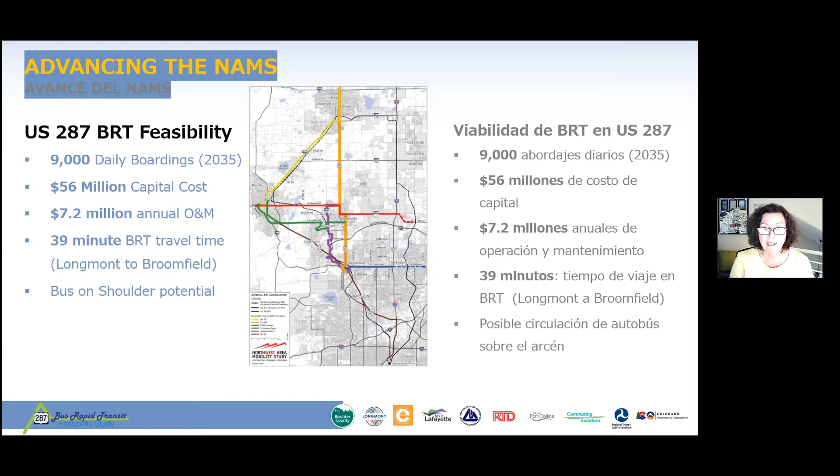So I'm very excited that we're here. It's a long time in the coming, and it's really the time to be moving forward, and a lot of good work's been done to date, and we certainly have more work to do in front of us, and we're anxious to hear your information to help guide that work with us. If I could have the next slide, please.

So when I think about this project, again, not only the important place that it serves in the network of mobility, it's really about the collaboration to get here. And so while I represent the Boulder County team that's working on this project, we're working very closely in partnership with our colleagues from the City and County of Broomfield. And so this is really all about collaboration with all of our agencies, Boulder County, the local communities, City and County of Broomfield, and others. So at this point, I'd like to hand it off to my colleague, Sarah Grant from the City and County of Broomfield, to talk more about our partnerships and collaboration together. So take it away, Sarah, thanks.

Thank you, Kathleen. Good evening. I'm Sarah Grant, Transportation Manager with the City and County of Broomfield. And Kathleen did a great job of highlighting the regional transit network that we're trying to build here in the Northwest. Boulder County and Broomfield and many other communities in the Northwest have been working on building this vision of a robust network of multimodal transportation for over 20 years as a part of the Northwest mayors and commissioners alongside RTD and CDOT. US 287 is a key corridor connecting US 36 and Broomfield Station to Lafayette, Erie, Longmont, and beyond. We're pleased to be a part of this collaborative partnership with Boulder County.

And this evening, I do want to acknowledge that joining us tonight is our new RTD District I Representative, Director Davidson, and I'd like to afford him the opportunity to also say a few words. Thank you.

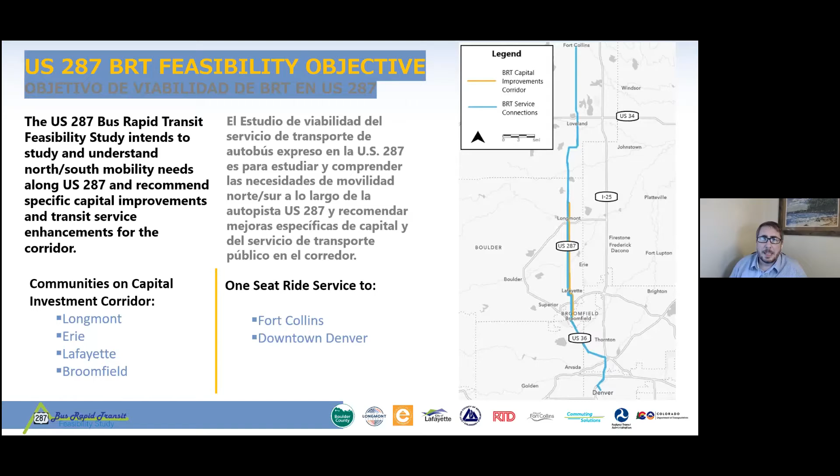And then beyond that little area, there are existing services with connections up to Fort Collins and into Denver. And so we are also looking at those services to look at the whole corridor in its entirety and what we can do for services as well.

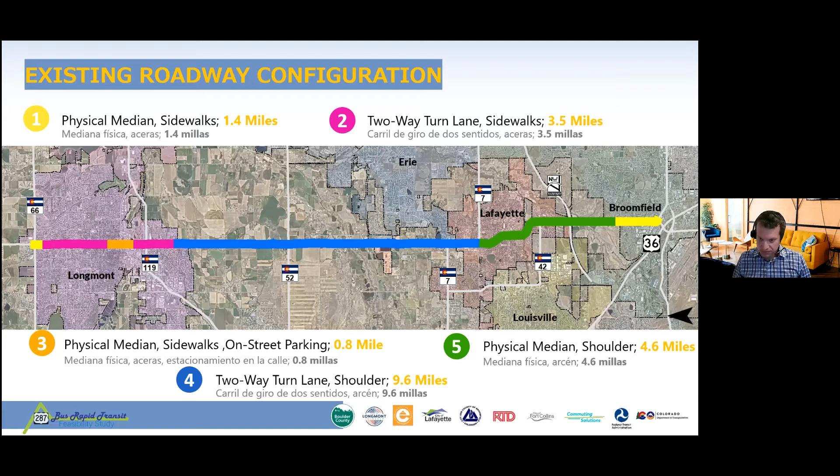So looking at things like number of travel lanes, are there sidewalks, is there on-street parking? It's something that we've been taking into account and will influence the recommendations as we assess the feasibility of BRT on the corridor. Part of this process, we've done quite a bit of data collection and analysis, and we have an existing conditions report that goes over some of that and will be publicized soon here.

From a traffic side of things, we've done some data collection, which has been a little tricky in 2020 due to COVID, but we have a lot of traffic counts from before COVID and some traffic counts during, and we've got a process going through to take a look and see what the traffic looks like throughout the corridor, and then specifically at intersections, how much delay is there now and will be there in the future, and how specific BRT, bus rapid transit, improvements might influence that as far as bus travel times and car travel times.

The key intersections that are currently experiencing the largest amount of delay, we've got 6 listed here, but the bolded ones are the ones with more delay of those that were evaluated: Baseline, the Northwest Parkway where that joins up with 287, and then Isabelle Road. There are other areas of congestion, but these are the key points. And as part of the recommendations, we'll be looking at these in more detail to come up with specific treatments that might improve things for a variety of users.

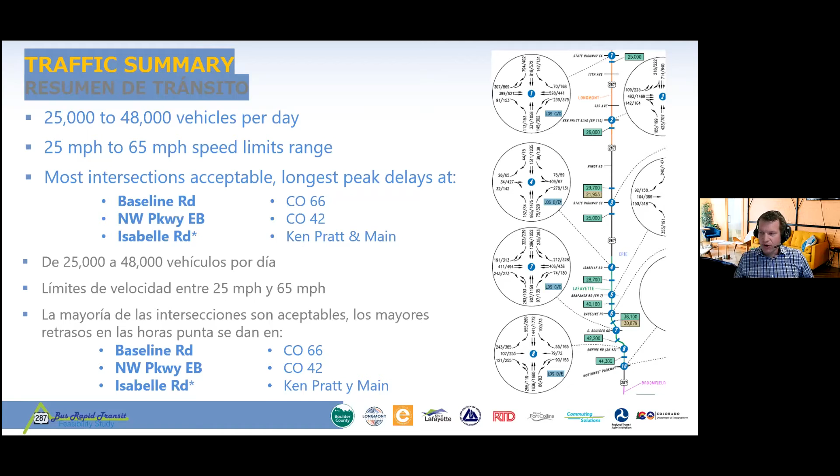So I'm going to transition into really the BRT feasibility analysis. That's the portion of the project where we're taking a look at what improvements could be made where, and what impact that might have upon the area. So to start out, just to give a little BRT primer, I think most people joining this meeting may know bus rapid transit and think of things like the Flatiron Flyer on US 36, or other implementations throughout the country and around the world.

But really it's different than local bus service in that it's faster, it's more reliable, and it can move more people. And it does that through a variety of design treatments that I'll mention in the next slide. It can offer a lot of the same amenities and travel times, sometimes even faster travel times than rail, at a more cost competitive price point. It's also a lot more flexible in that you can divert from one route to another and have multiple service patterns. And it's scalable to fit the needs of different communities.

Often bus rapid transit is improvements that are made to high ridership bus corridors that connect some of the major regional destinations in the area. A few of the typical improvements that are implemented to create bus rapid transit, it's kind of a menu of options, in terms of you could do a few of these or all of these, and each one offers a different level of improvement. But really the typical ones when you think of true bus rapid transit are dedicated transit lanes, where the bus operates independent from traffic and isn't subject to any levels of congestion.

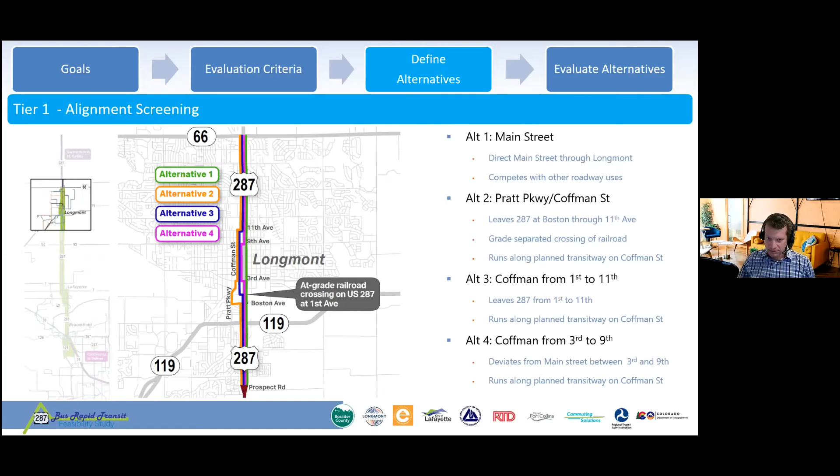Nick, why don't you move us on to our next alignment and see if we can open up the poll again so we can talk about Lafayette. Let's do that. And Jeff, if you want to chime in on the poll at all, please feel free to speak up. But I can move on to Lafayette. If we need to, we can come back to these slides for another poll if we want to get a map with that.

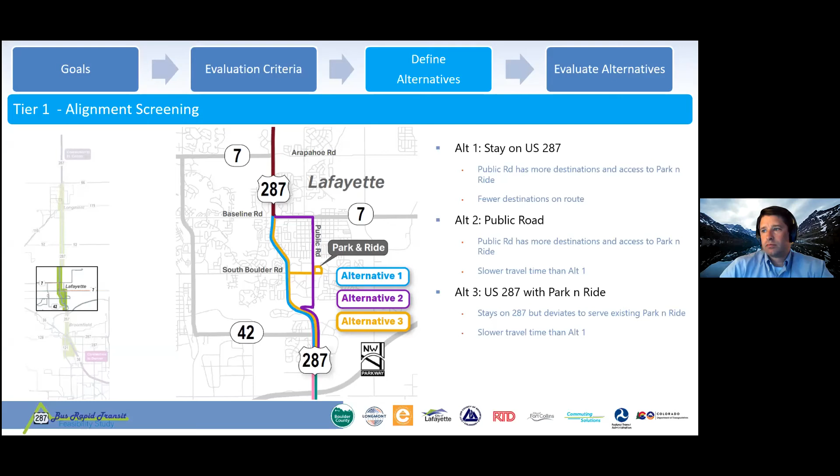Also, I just want to remind you, if you have questions about these alternatives as we go through them, please put your questions in the Q&A. All right. So I believe the polling is not functioning, is what I read here. If you're able to select and submit, please do that. Otherwise, we'll circle back at the end and do some additional discussion on the Q&A or do some additional polling if we can here.

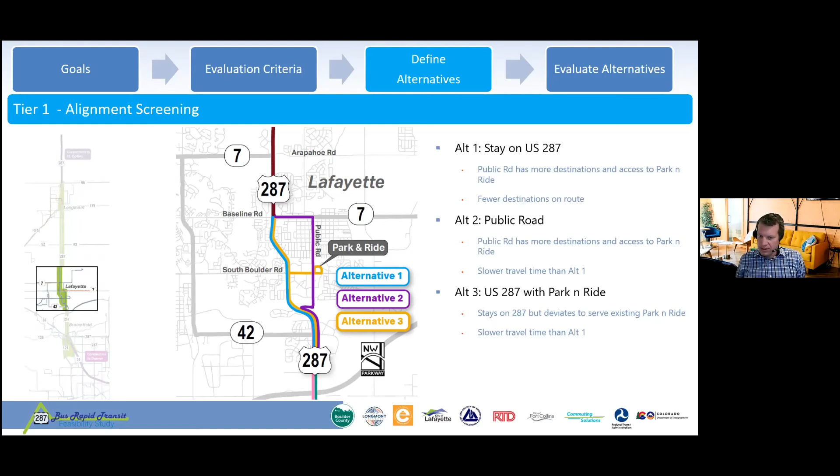I'm going to move on to Broomfield, just south of Lafayette here. So yeah, please continue all your comments and questions on all of these as we move into Q&A. We want to have some good discussion at the end. So I'm going to roll through this so we can have time to do that. Broomfield, we're really looking at some service options for buses that connect to Denver or buses that are terminating in Broomfield and turning around and going back north again.

Alternative 1 is using the existing slip ramp on US 36 and following the same service that the Flatiron Flyer currently follows on 36. Alternative 2 is on the west side. It follows 287 on the west side of US 36 and uses Transit Way connecting up to the Broomfield station here.

And then the last, alternative 3, is for buses in a similar way that 2 is. It's for buses that are terminating in Broomfield and turning back around, but it's using an alignment that gets off of 287 and follows Commerce Street. It has some potential delay associated with crossing the railroad that we've notated here. When you look at the differences between the two, they have the capability of serving different people, both businesses and residences that are located on both sides. Just to mention, there is an existing pedestrian bridge built there that easily connects both sides for people making transfers that would need to access either side.

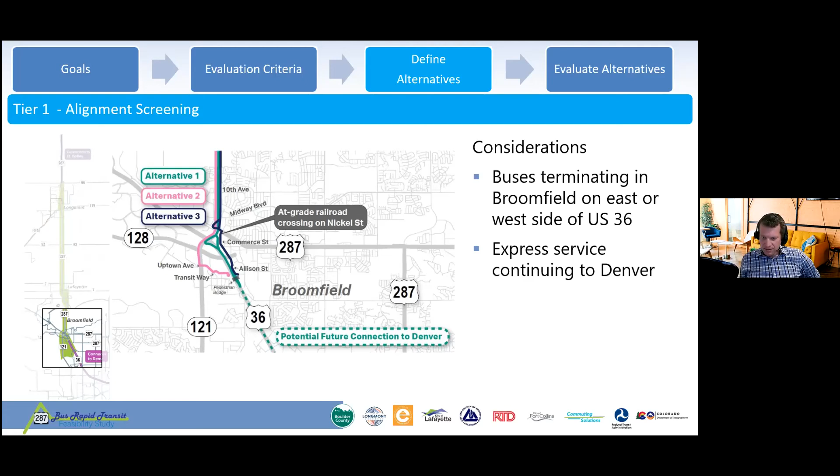So we got polling on this, if we want to use the chat like we've been doing, unless we want to try polling one more time. Yeah, let's just go ahead and use the chat like we've been doing. But just to run over the options again, alternative 1 is buses using slip ramps on US 36. Alternative 2 is west side of US 36 using Transit Way. And alternative 3 is east side of US 36 using Commerce Street. Great. Let's continue to have folks chime in the chat. And I'm going to continue on so we can have that time to discuss at the end as well.

So in addition to the alignments that we just went over for each of the communities, there's other considerations when you look at stations. Of the existing bus stops, some have more ridership than others and are utilized more. When you look at BRT improvements, you start looking at minimizing the number of stations to have faster travel times, but also keeping enough stations to serve the needs of people along the way and allowing the BRT to function. So that stop spacing becomes pretty important when you look at the trade-offs there.

Also, the land use surrounding each of the existing bus stops and proposed bus stops that we're looking at is being considered, and then other major trip generators like the hospital in Lafayette or other major businesses that are located along the roadway as well. And through all this, we're looking at things with the lens of equity in terms of understanding the dynamics and the makeup of each of the communities, and not preferencing one place versus another or one type of bus user versus another, but providing services for all.

And then as part of this project, we are developing a stations area toolkit. That is in process, and we are working on that, and we'll be presenting on that during our next public meeting. But that stations area toolkit is really going to guide what types of BRT station improvements could be made on this corridor, as well as other locations in Boulder County. So we'll have some great information to share on that in the future here.

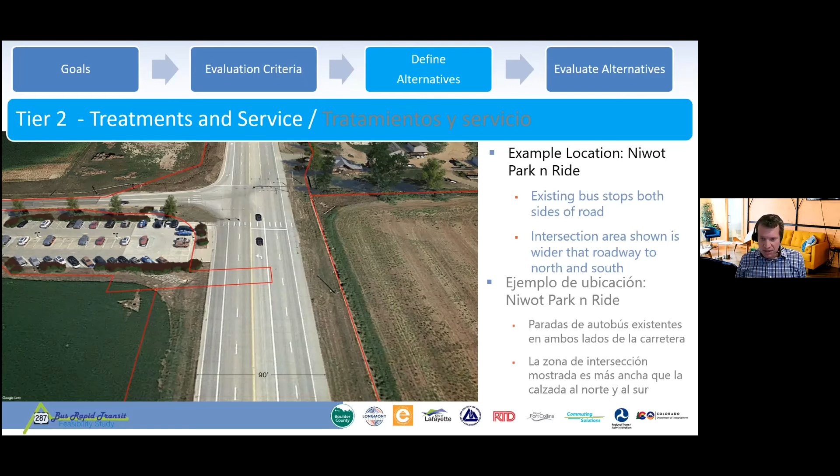This is the Niwot Park and Ride, which is just one location on the route. It's a 90-foot right-of-way from edge to edge. So that's the existing pavement there is to work with. There's an existing bus stop located there. But when we look at what would happen if you were to put in some sort of dedicated lane, or what's called a BAT lane, business access and transit lane.

An exclusive lane can be shown with paint as shown here, and the bus is the only thing running in that. This BAT lane over here would be shared with the right turn lane going on to Niwot Road, as well as people turning off of Niwot Road coming onto 287, their acceleration lane. And that's all utilizing existing pavement, which is one benefit to making improvements like this in some areas.

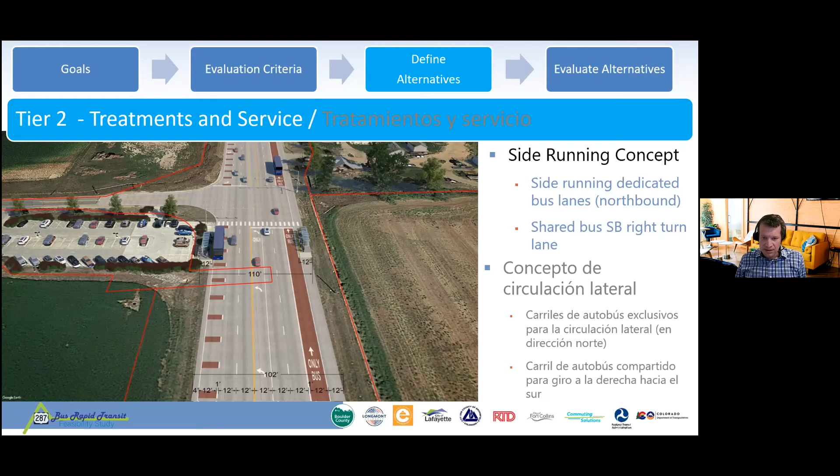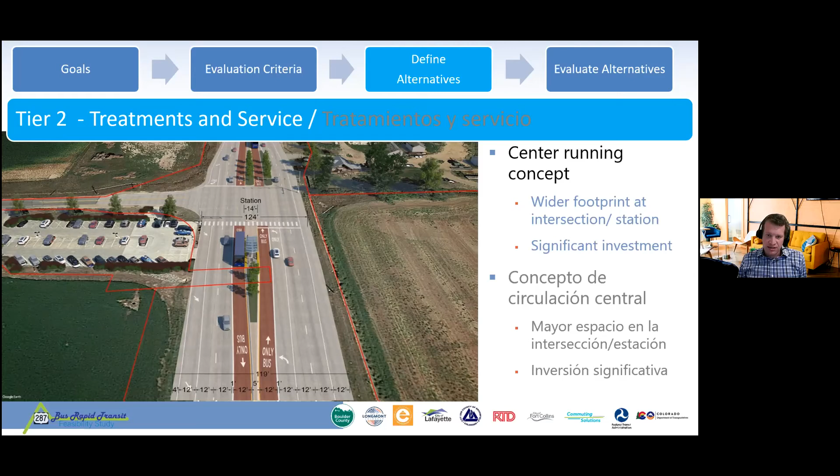And then also in consideration, this is a feasibility study, so looking at all options of improvements, having the bus-only transit lanes running down the center of the road has a lot of different operational impacts. It does create a different type of environment. It also takes a lot more space. It has a bigger footprint than doing side running or other improvements, but it's another level of investment that could be made on portions or all of this route that could be considered as part of this process.

So in summary, with that two-tiered screening process, we are hoping to walk through that as part of this feasibility assessment and evaluate the various alternatives to come up with the preferred alternative that we can continue forward with in the process that Boulder County is working with. So with that, I'm going to pass it to Jeff, who is going to talk about the next steps of this project. And after that, we're going to open it up to have some discussion or answer some questions.

Great. Thank you very much, Nick. Appreciate that overview. You did a good job, and hopefully the visuals were helpful as well.

Moving forward, we want to continue with the community engagement through various means, and one of those is reaching people where they are through community conversations. So if you have a group that you would like me to attend to present to and have the conversation, it doesn't have to be this long of a presentation. It could be 10 minutes, 20 minutes, half hour, however long. People have enjoyed having me come. So if you know anyone, please email me personally. My email will be at the end.

We have a stakeholder working group who is helping guide this. Some of the members are here today. Thank you for joining. And they're helping really determine what is viable in the local communities. They're representatives from all of our partner municipalities and partner agencies. And they are helping determine really which alternatives we should move forward. And some of the communities have already done a lot of planning, which is extremely helpful. And some of the communities, we still have a lot of questions to answer.